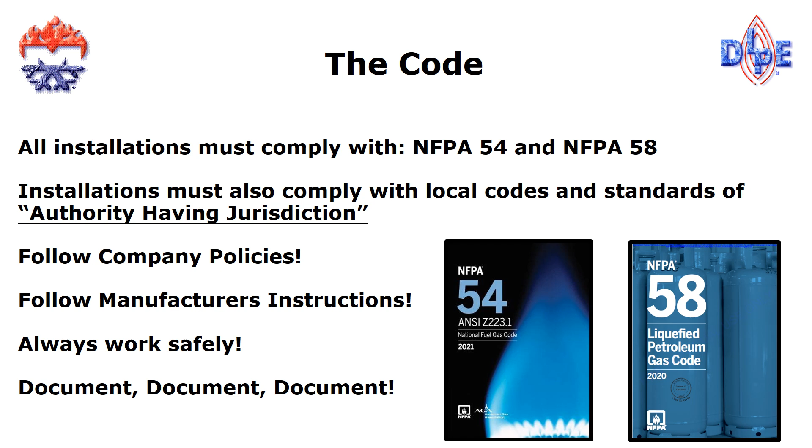A breakdown of the differences between NFPA 54 and NFPA 58: NFPA 58 covers everything from the container all the way up to the outlet of the delivery regulator. Now that may be an integral twin stage regulator or a second stage regulator. NFPA 54 covers everything from the outlet of that very same regulator all the way inside the building.

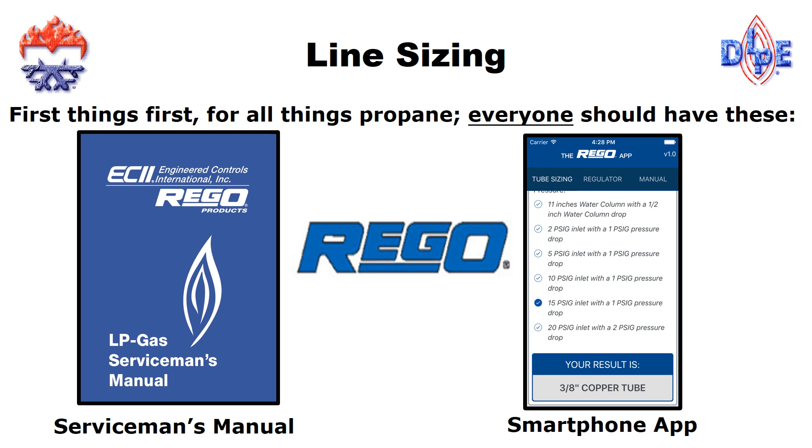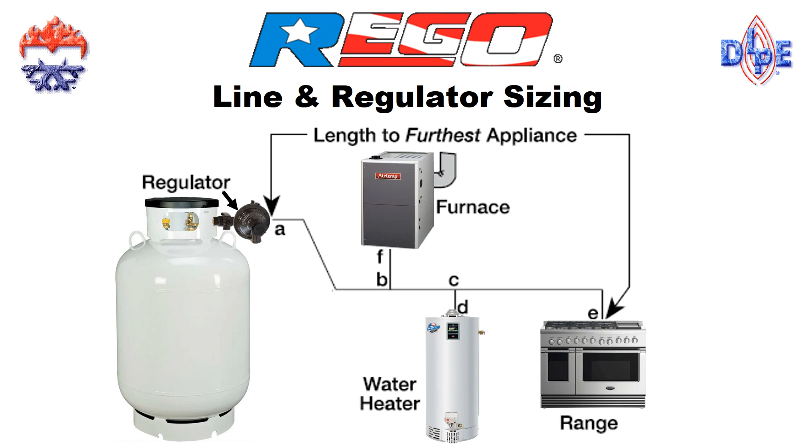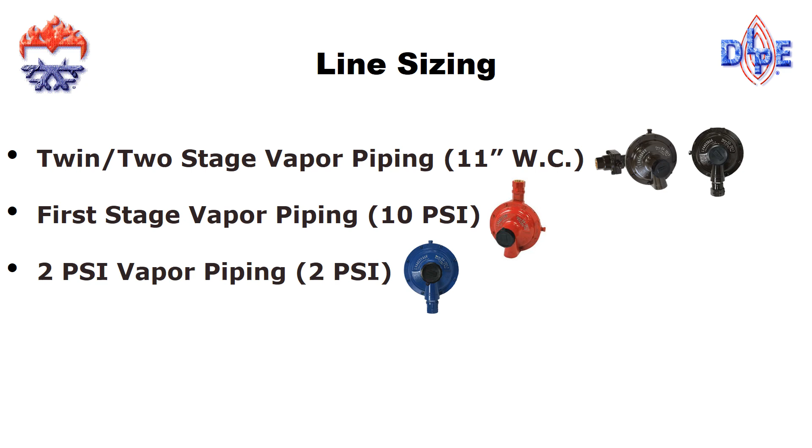Probably the most common piping installation an LP gas service technician will do is low pressure 11-inch water column piping systems. Today we will be discussing and sizing some low pressure installations as well as some other things. Part of the conversation today will be twin or two-stage vapor piping, first stage vapor piping, 2 psi vapor piping. We're going to discuss a little bit about liquid piping and also some generator piping tips.

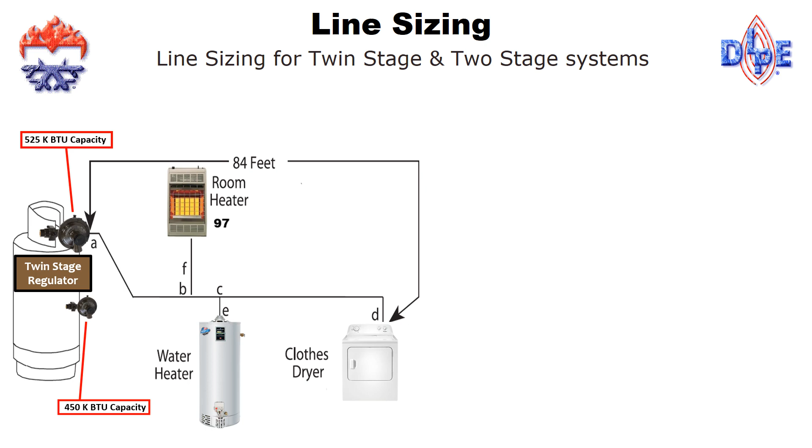Low pressure piping applications can be viewed as either twin stage installations or two-stage installations. A typical twin stage installation generally occurs when the container is closer to the building, whereas a two-stage system, oftentimes the container is set out away from the building, allowing the use of high pressure from the container up to the building, where the second stage regulator will drop it down or reduce it to operating pressure, 11 inches water column. You'll note in this slide that a twin stage regulator is the same color as a second stage regulator. That's because REGO identifies these regulators by the outlet pressure they're set to. So a brown regulator indicates that this regulator is set for 11 inches water column.

Additionally, when sizing a regulator for either a twin stage or a two-stage installation, always compare the BTU capacities of the compact and the standard size. If the BTU load of the job is close to the capacity of the given regulator or the smaller regulator, always move up to the next size.

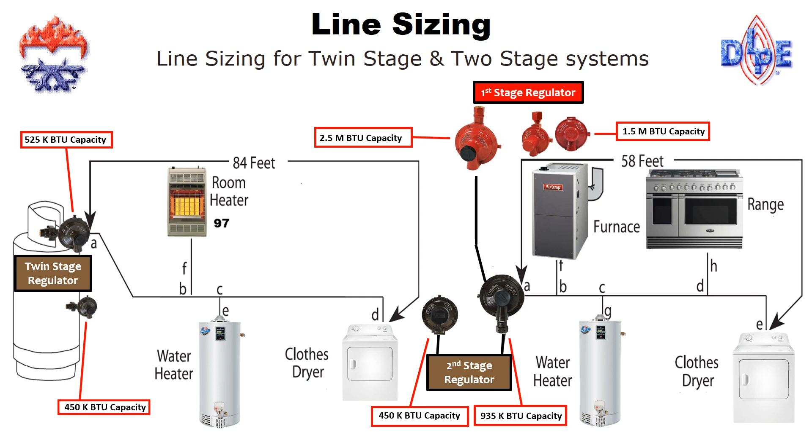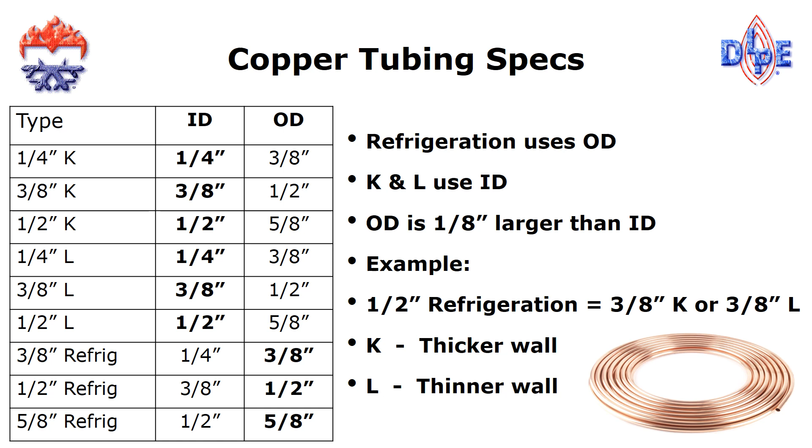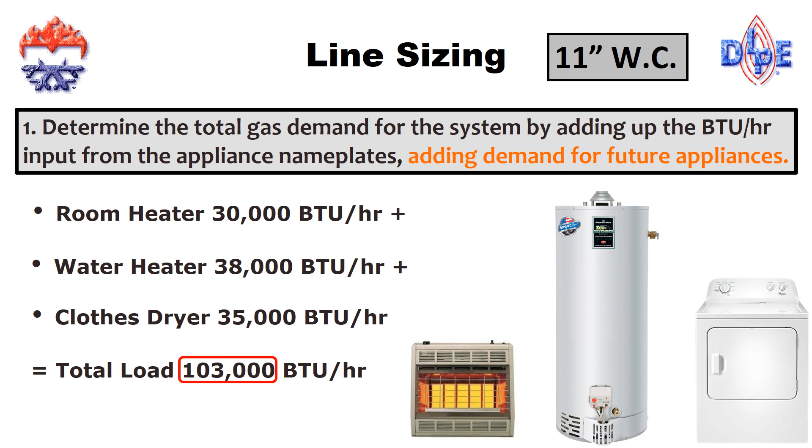Start out today by sizing a very simple low pressure piping system for a residential application. The very first thing we do whenever we're sizing a propane piping system is to add the total number of appliances that this system will be required to supply. In this case, we have a 30,000 BTU room heater, a 38,000 BTU water heater, a 35,000 BTU clothes dryer. All three appliances have a total of 103,000 BTUs. Remember, propane appliances operate at a low pressure of 11 inches water column. Now is also the best time to ask the property owner if they're going to be adding additional appliances. Provisions should be made now if appliances will be added in the future. Oversizing the line to account for the additional appliances will save time in the long run.

The next step to size a second stage or twin stage vapor piping system is to take a measurement from the outlet of the delivery regulator to the inlet of the appliance that's farthest away. In this case, it's the outlet of the twin stage regulator to the inlet of a clothes dryer. That's the only measurement you need when sizing a piping system.

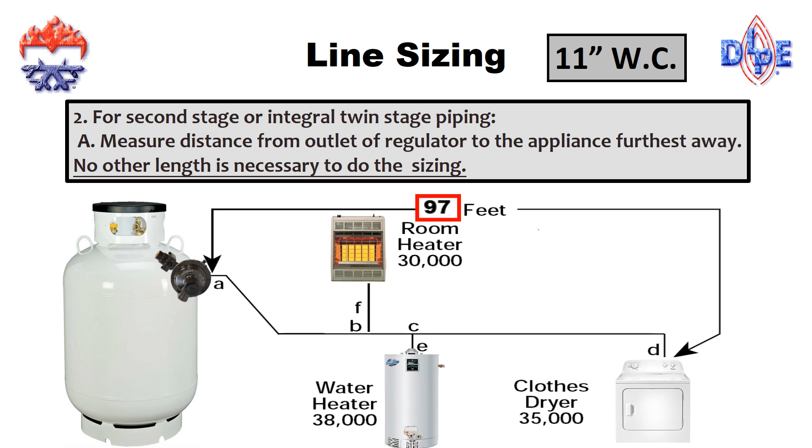The next step would be to make a simple sketch or a map of the piping installation.

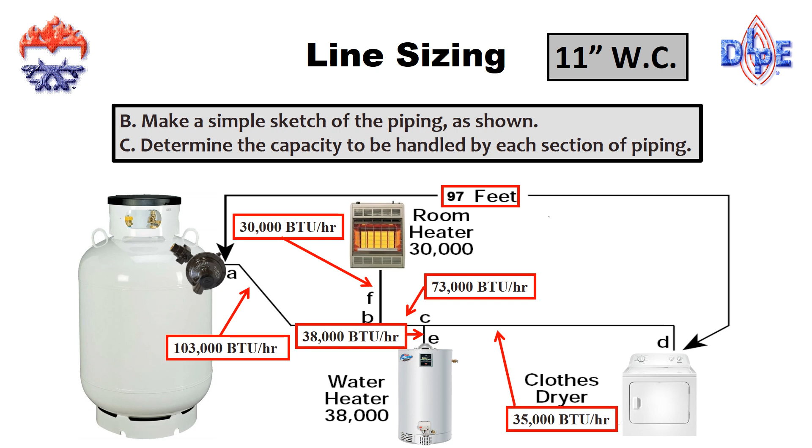The next step is to determine which table in the L545 we're going to use, and also which column we're going to use with regard to the length of piping. Remember, we're sizing a low pressure 11-inch water column piping system.

Also remember that when we took that measurement between the outlet of the delivery regulator and the inlet to the appliance furthest away, it was 97 feet. Well, if you look at the columns on table 3, you'll notice that there is no 97-foot column. So what we choose in this case is the 100-foot column. You always want to use the column longer, or the number higher than the actual measurement. You never want to go down, you always want to go up.

This 100-foot column on table 3 will be used for every piping measurement that we make. In other words, the main trunk line from the regulator to the first tee, from the tee to the space heater, from the tee to the water heater, and also from the length of piping to the dryer. So regardless of how long these actual runs are, the 100-foot column will always be used in this particular application.

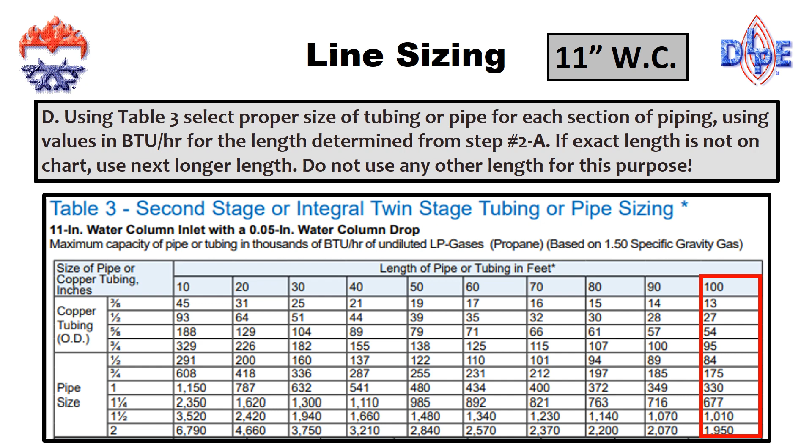The first section of piping we're going to size is what I call the trunk line, the section of piping between the regulator and the first tee in the system. This section of piping is going to be required to handle the entire BTU load at any given time, so it has to be sized, in this case, for 103,000 BTUs.

Remember, using the 100-foot column, we're going to size this piping. We know we need at least 103,000 BTUs. So if we go down that 100-foot column, we finally see a number that's over 103,000. It happens to be 3/4 inch black iron pipe. So we're going to choose 3/4 inch black iron pipe for this application, this main trunk line, which will give us 175,000 BTUs at 11 inches water column.

The next section of piping in this installation is the section or segment of piping between B and F, or the first T in the system, to the inlet of the 30,000 BTU space heater. Again, using that 100-foot column, we go down and look for the BTU value, or the number higher than 30, or higher than 30,000. In this case, we're finding...

54,000 for 5/8 copper tubing, or 84,000 for half-inch black iron pipe, depending on what material you will be using. So again, in this case, we're going to be using either 5/8 copper or half-inch black iron, because the numbers represented in the 100-foot column are higher than the BTU value that is required for that heater.

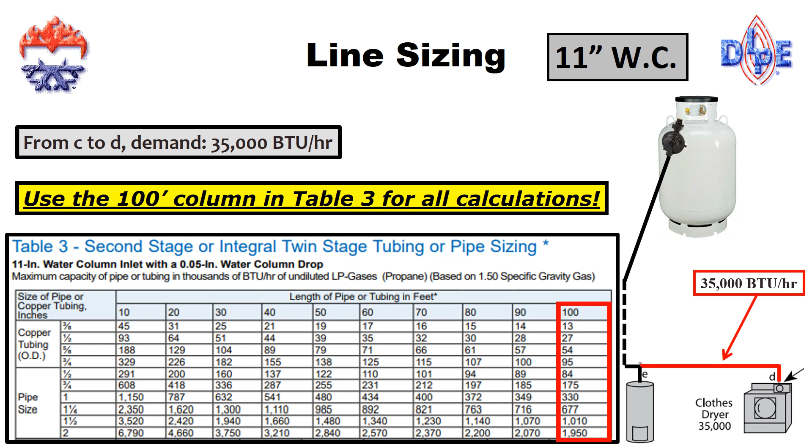And the last section of piping, between the second T and the inlet to the clothes dryer furthest away, again using the 100-foot column, we're looking for numbers over 35,000 BTUs. So again, in this case, we find 5/8 copper valued at 54,000, or half-inch black iron pipe valued at 84,000 BTUs. So what have we learned here?

We've learned that we're using the same column for every pipe measurement based on the longest run between the outlet of the delivery regulator and the inlet of the appliance furthest away. And we've also learned that there are different materials we can use to accomplish the same thing.

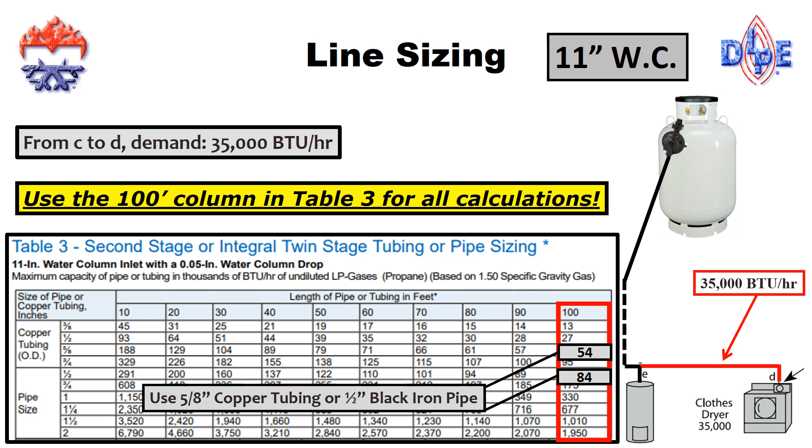My guess is in this particular installation, the installer would run a 3/4 inch trunk line based on our calculations, and then either continue for the entire installation with 3/4 inch black iron, or branch down to half-inch black iron to complete the installation. Either one would work, provided no appliances will be added in the future.

What's often overlooked when sizing a piping installation is accounting for the fittings. On page 48 of the REGO L545, you'll see the representative equivalent lengths of pipe for various valves and fittings. For example, a 3/4 inch Schedule 40 90-degree elbow equals nearly 2 feet of piping.

So for example, if the equivalent length of a 90-degree elbow, Schedule 40, 3/4 inch, is 1.8 feet, and you had, say, 10 elbows in an installation, you would have to add 18 feet onto the overall length measured from the outlet of that regulator to the inlet of the appliance that's furthest away.

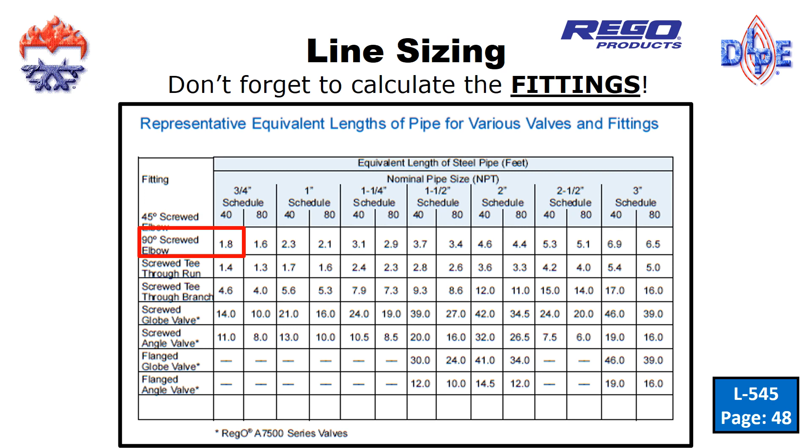We've just sized a very common 11-inch water column low pressure piping system for a typical residential application. Remember, propane appliances operate at 11 inches water column inlet pressure.

Now we're going to size the first stage side, or the high pressure side, of a two-stage installation. This could be either a conventional two-stage installation or a two-stage 2 psi installation. The first stage side of either one of those installations is sized exactly the same.

So in this particular application, this first stage side of this installation has a 338,000 overall BTU load. We're going to be sizing our first stage side of this installation using both copper tubing and also poly pipe, in two separate charts.

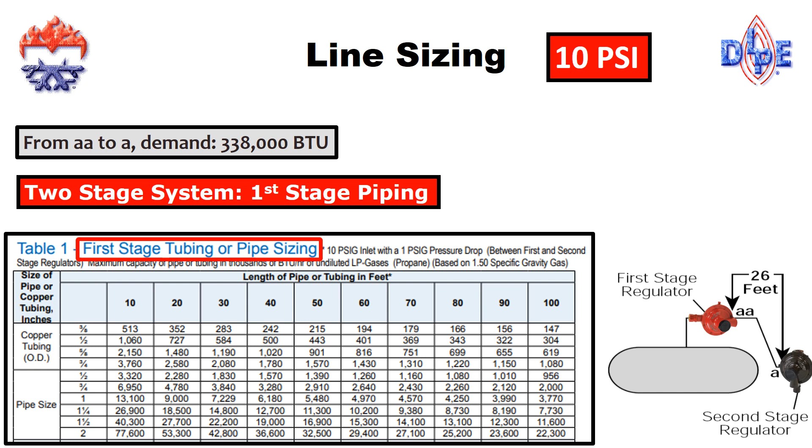So now we make sure we switch tables in the REGO L545. In this case, we're going to be using table 1. We're going to be sizing the high pressure side, or the first stage side, of this installation using copper tubing.

So in this particular case, again, we have a total BTU load of 338,000 BTUs. We have a 26-foot run from the outlet of the first stage regulator to the inlet of the second stage regulator. If you look at the chart on table 1, we're going to be using the 30-foot column in this case, because it's higher than the 26-foot length that we have in our installation.

So using the 30-foot column, and remembering that we have a 338,000 BTU total load, which size copper tubing would you use, or could be acceptable for this particular installation? By looking down, we see that half-inch copper tubing with a value of 584,000 BTUs at 10 psi and at 30 feet would work for this installation.

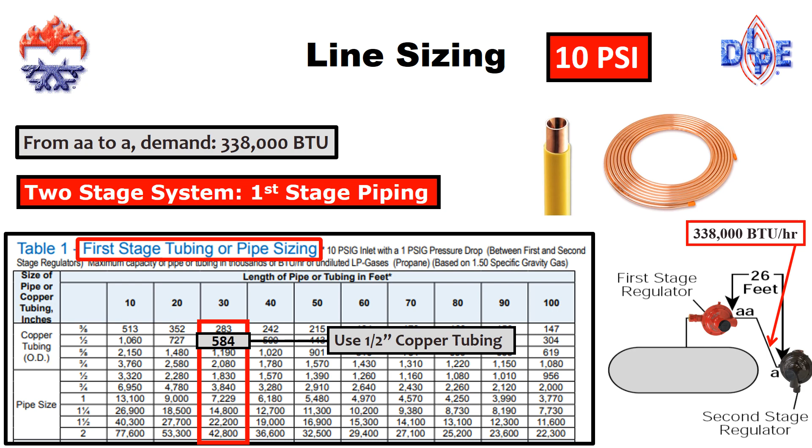If the goal is to use polyethylene pipe, we want to make sure we change tables in the book. This time we want to use table 2. We have that same installation we're sizing, so again, we have a 26-foot run from the outlet of the first stage to the inlet of the second stage.

And on table 2, we're also going to be using the 30-foot column. There is no 26-foot column. So with the understanding of a 338,000 BTU load, using the 30-foot column, we're going to be using half-inch CTS, which will get us over 700,000 BTUs.

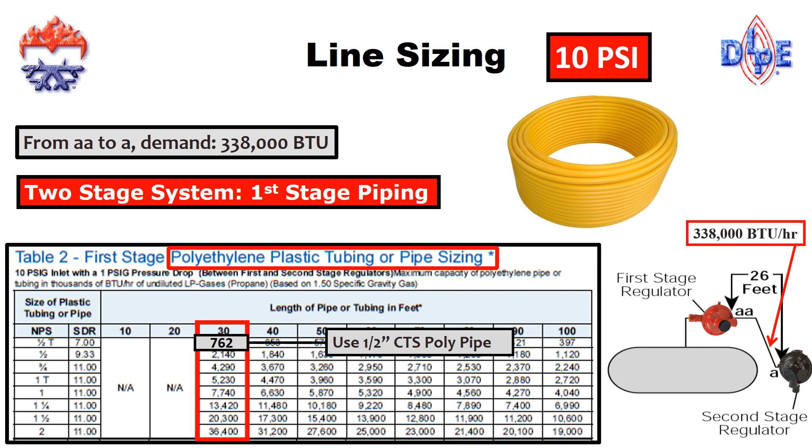On the left side of table 2, the poly pipe chart, you'll see the letters SDR, which stands for Standard Dimensional Ratio. It's the ratio of the pipe diameter relative to the wall thickness. Poly pipe with a high SDR indicates that the pipe wall is thin, compared to a pipe with a low SDR ratio, which would indicate that the pipe wall is thick.

The key here is to make sure that the fittings used with the selected poly pipe match. In other words, the sizing matches and also the SDR matches. Otherwise, you're going to have fitment issues and also the potential for a leak.

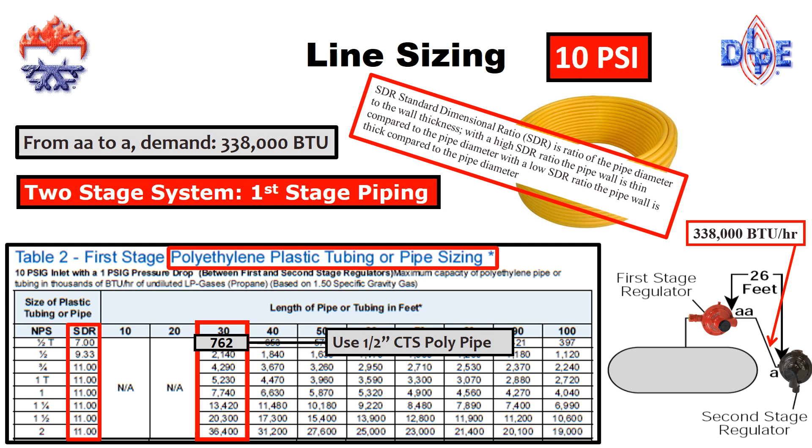A quick note about CTS, copper tube size, versus IPS, iron pipe size. Depending on what type you're using, make sure you follow the proper line on table 2. This is where the SDR notification comes in. If you're using half-inch CTS with a 7.00 SDR, make sure you're using the proper line in addition to proper fitting selection. If you're using half-inch IPS with a 9.33 SDR, make sure you're using the proper line for that material, again along with the proper fittings.

Half-inch IPS nearly triples the BTU capacity of half-inch CTS. Therefore, making sure you're using the proper line when determining the pipe sizing is critical.

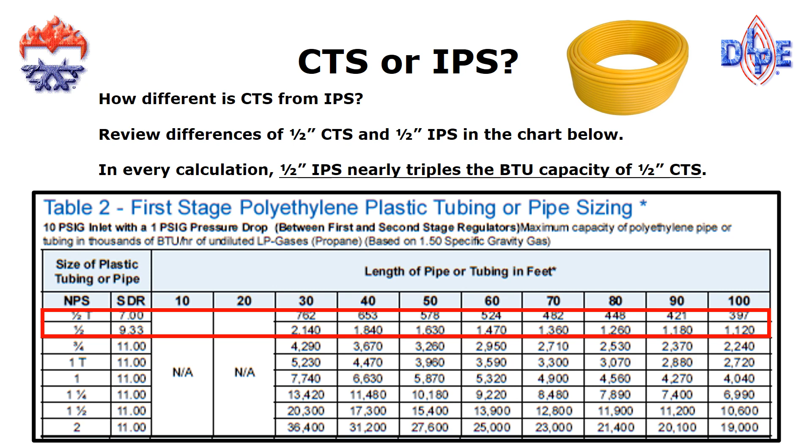We've just sized the high pressure side, or the first stage side, of a two-stage installation. Well, let's say that this two-stage installation happens to be a 2-pound system, or a two-stage 2-pound installation. There are separate charts in the L545 for reference when sizing a 2-pound system. Let's make sure we're doing it properly.

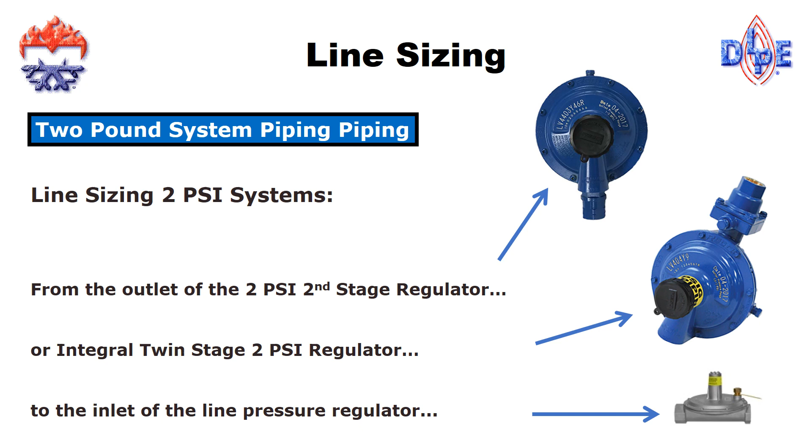The first thing is to make sure we're using the correct table. If you're going to be using CSST, for example, in this 2-pound installation, you want to make sure you're using table 4, which is the CSST 2-pound table. In this case, again, we have that same 338,000 BTU total load, but this time we're sizing it from the outlet of the 2-pound second stage regulator to the inlet of the line regulator. We have a 19-foot run, so on table 4, we're going to select the 25-foot column. We have a 338,000 BTU load, which, following the numbers down, tells us that we can use 3/8 CSST.

Please note, though, that this 3/8 CSST has to be 15 EHD, or equivalent hydraulic diameter. The letters EHD represent a measurement of the relative hydraulic efficiency between the different CSST sizes. The greater the value, or the larger the EHD number, the greater capacity the CSST has. Again, depending on what type of CSST you're using, always make sure you're using the proper line on the chart. In this case, the 3/8 CSST that we selected had a 15 EHD, meaning it would supply all of our appliances properly.

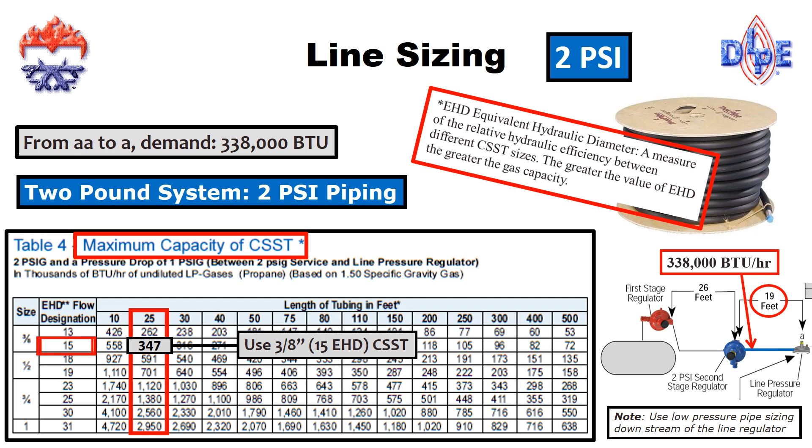If you've decided to use copper tubing for that same 2-pound installation instead of CSST, make sure you're using the proper table, table 6 in this case. Again, we have a 19-foot run, 338,000 BTUs. Following table 6, the 20-foot column, because it's just over the 19-foot length, tells us that we can use either 1/2-inch copper tubing or 1/2-inch black iron pipe. Either one of those two selections will more than handle the 338,000 BTU load for this installation.

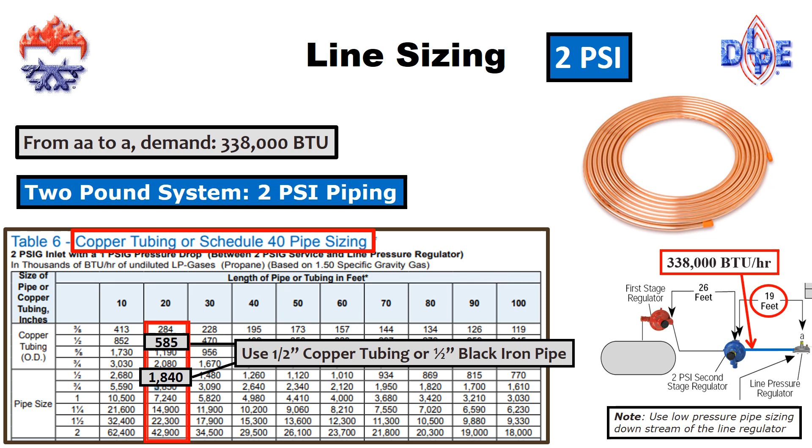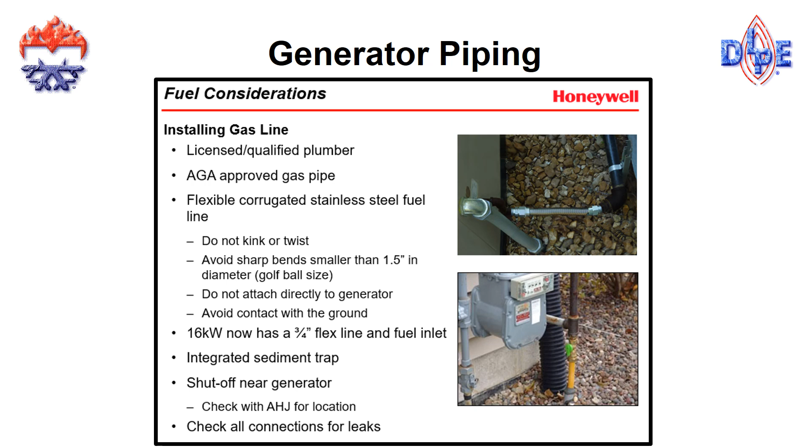It's important to make sure that we're supplying these generators with a proper amount of pressure. Generac and Honeywell require the inlet pressure to a 9 to 22 kW propane generator to be between 10 and 12 inches water column. It cannot deviate from that inlet pressure setting. Supplying a generator with 9 inches of water column or 13 inches of water column will give that generator startup issues.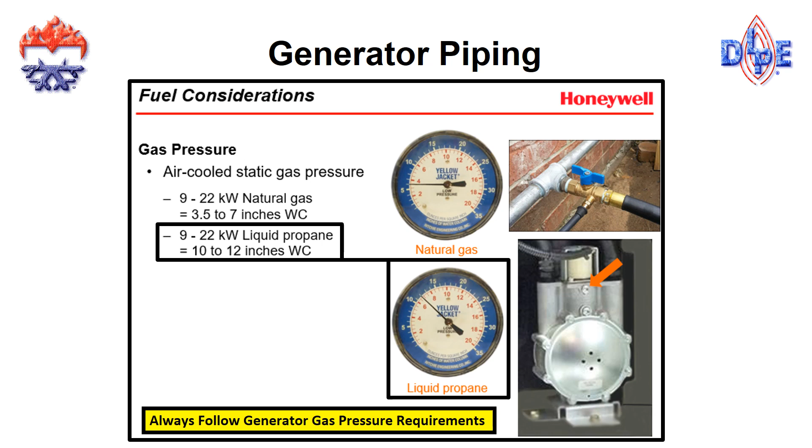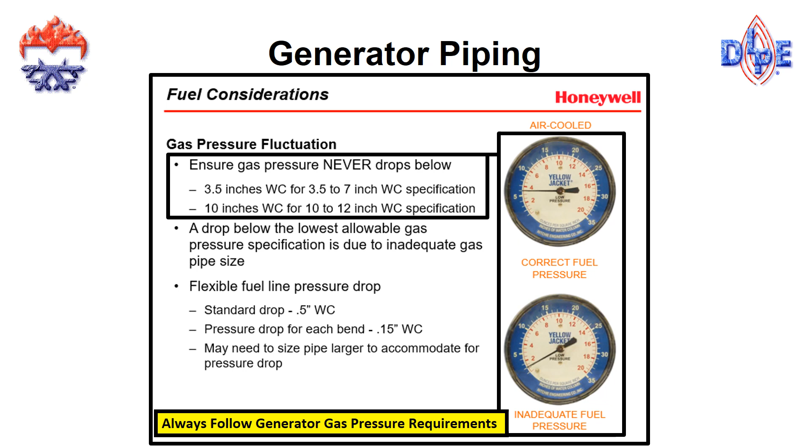Pressure that drops below the 10 to 12 inch water column spec for propane fired generators most likely indicates a pipe sizing problem. Generators do require a slightly different pipe sizing procedure. Understand that the generator inlet size does not affect the proper gas piping size. If the piping is sized at 1 inch based on the length of run and the overall load, but the generator has a 3/4 inch inlet, it will not affect the performance of the generator.

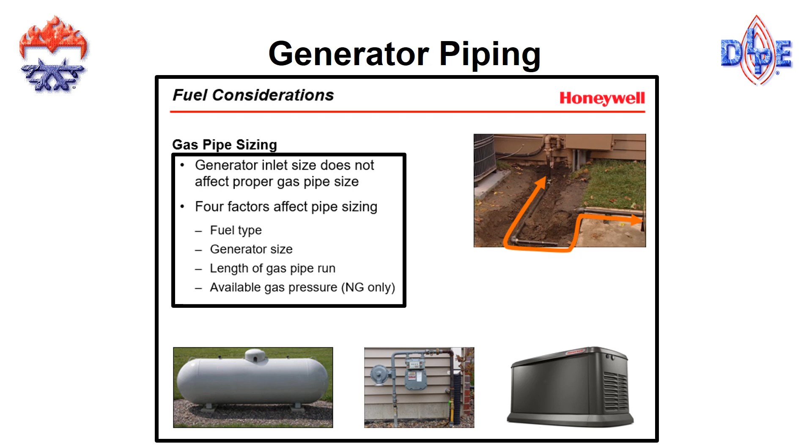When using the pipe sizing charts in the generator installation manual, it's important to note that the piping determined is based on sizing the piping at the pressure the generator operates at. For example, if it's a two-stage system, the overall length only includes the low pressure 11-inch water column side. The high pressure side is calculated in a different calculation.

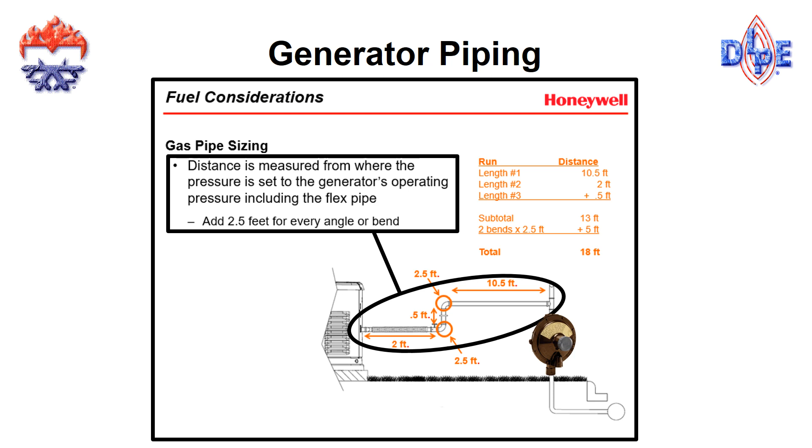Looking at this example in the Honeywell installation manual, sizing this piping at 11 inches water column, or what the inlet pressure of the generator is, we have a 22 kW generator with an inlet pressure of 11 inches water column. The length of this particular run is 18 feet. So to size this piping properly using the chart in the Honeywell installation manual, we go down the left-hand column and find the 22 kW generator, follow it over to the right and find the number that represents the next highest amount over our run.

For example, our run is 18 feet, we go over to 20, representing 20 feet, because this piping size will account for or accommodate up to a 20-foot run for a 22 kW generator. We find the 20 feet, follow it up to the very top, and it tells us that a 20-foot run of 3/4 inch pipe will account for and accommodate a 22 kW generator at 11 inches water column.

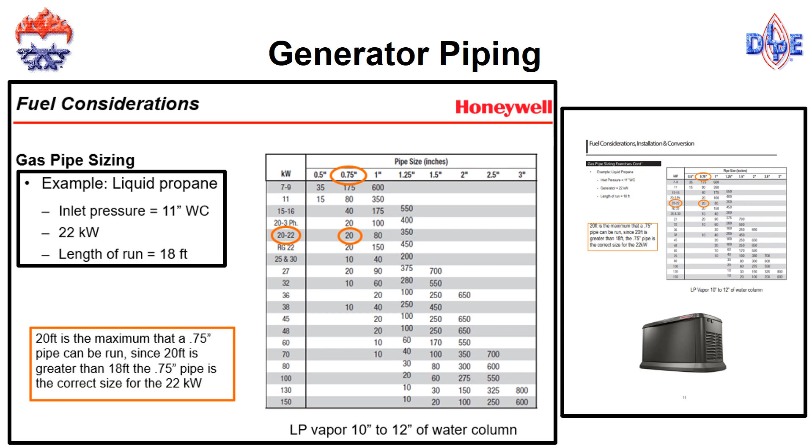What about potential generator startup issues? Some manufacturers explain and recommend installing piping one size larger than what's recommended in the owner's manual at the last 10 feet of the piping run at the generator, which may help with any startup issues. Another thing that's possible is to install a 2-inch nipple with 2-inch by 3/4 inch bell reducers at the unit as well. Sometimes this provides just enough storage capacity at the generator to help with any potential startup issues down the road.

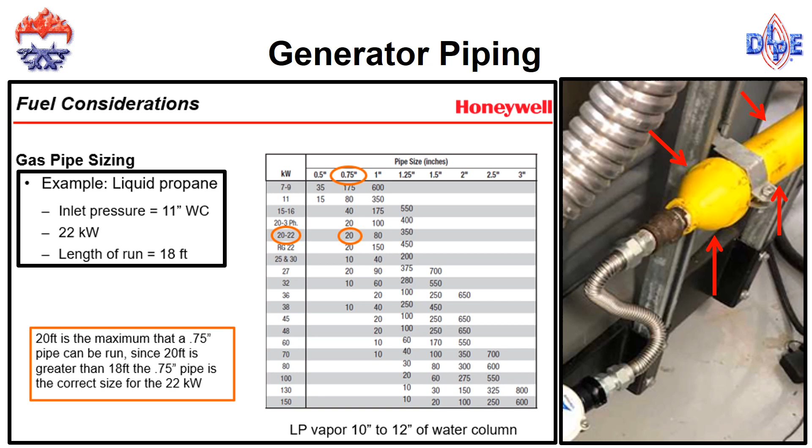One of the most important things to come away with from this seminar regarding generator piping installations and selection is to make sure the proper regulators are used. No generator installation should ever include a compact style regulator, whether it's a first stage or a second stage. Additionally, when sizing the second stage for a generator application, always make sure we size a REGO LV5503 series second stage regulator. These regulators are built with a larger diaphragm. It provides a smoother, more consistent pressure delivery, in particular to these high demand generators, and it will assure a smoother startup, especially with any installations that have had startup issues in the past.

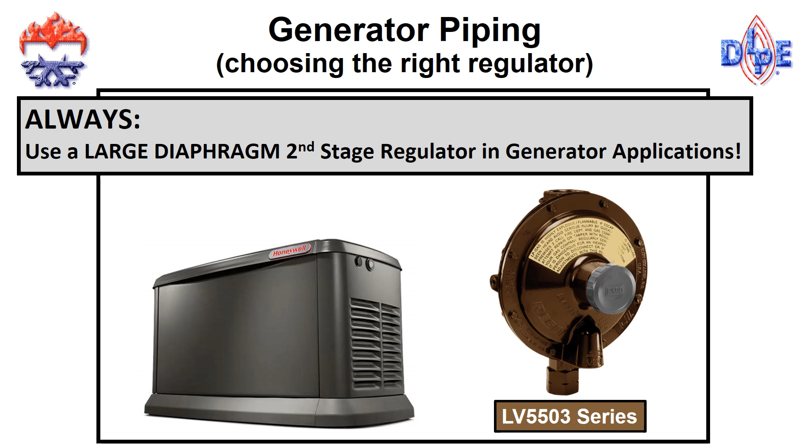Sometimes it's not possible to properly install a second stage regulator at a generator. We've worked closely with REGO and we've come up with a solution to some of those instances.

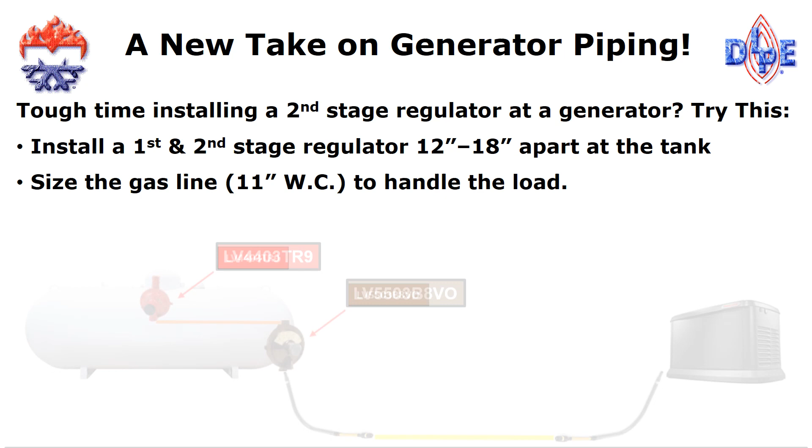Sometimes simply installing an LV4403 TR9 along with an LV5503 B8VO with a vent over outlet at the container, and running piping from the outlet of the regulator to the inlet of the generator, will supply enough pressure and enough BTUs to allow for smooth generator operation. Of course, the piping has to be sized properly, the regulators have to be installed properly, and in particular that 5503 series second stage is required to have a vent over outlet so it can be properly installed per NFPA 58 specs.

What about sizing liquid propane piping? On page 47 of the REGO L545, there's a chart to do just that. You must determine what the total gallons per hour usage is at the point of use. You'll also have to determine the distance between the container supplying the liquid and the inlet to that piece of equipment. Once you've determined the gallons per hour consumption and the distance from the container to the equipment, the chart makes sizing that liquid piping very simple.

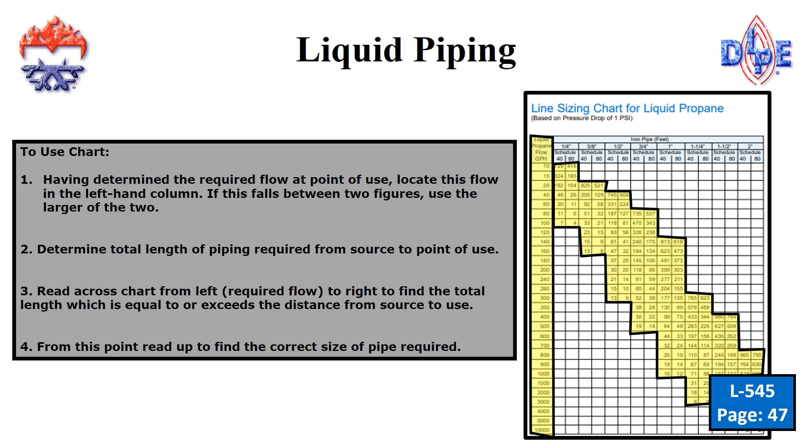Here's a comparison between K-copper and Schedule 80 steel pipe when you're determining what pipe sizing to use for that liquid burning appliance that you're connecting to.

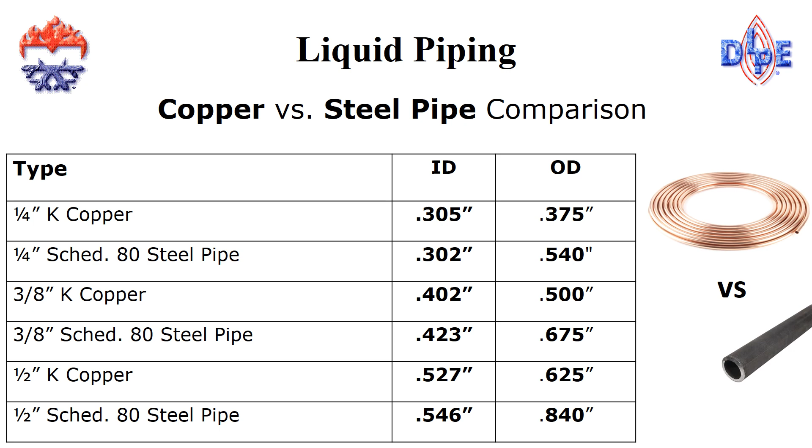I'd like to take a minute and discuss the differences between pressure testing and leak checking. Many times these are confused in our industry. The difference is pretty straightforward. Section 8.1 of NFPA 54 indicates that pressure testing is only done on new installations or when an existing installation is modified or added to. It's done at 1.5 times the proposed maximum working pressure of that system, at not less than 3 psi for a minimum of 10 minutes in a single family dwelling. Air, nitrogen, carbon dioxide, or an inert gas can be used for this test.

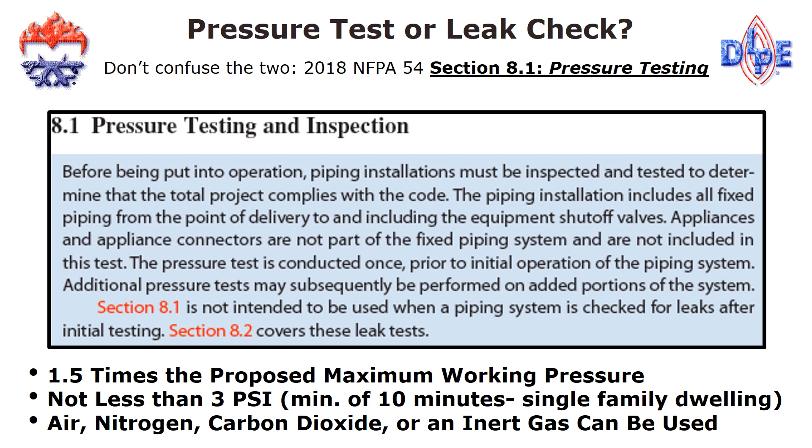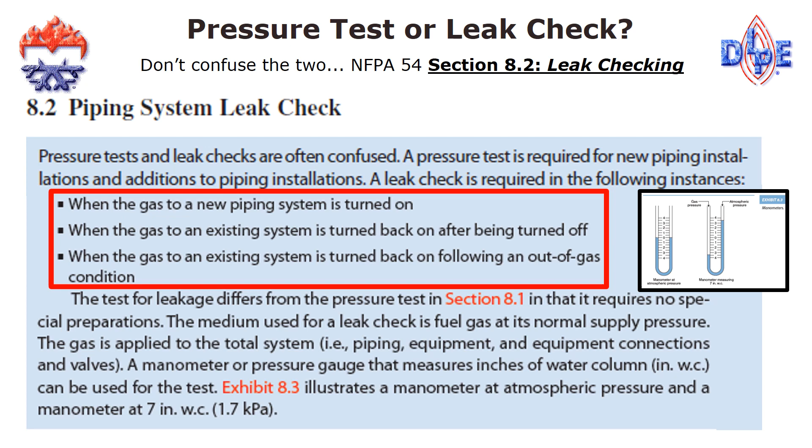By comparison, NFPA 54 determines that a leak check is required when the gas to a new piping system is turned on, when the gas to an existing system is turned back on after being turned off, or when the gas to an existing system is turned back on following an out of gas situation. Basically, this follows any interruption of service—that would determine that a leak check is required.

Leak checking should be done when a system of new or modified gas piping is placed into service for the first time, assuming it's already been pressure tested; when a gas leak is suspected; when a gas meter is replaced; when an appliance or appliance connector is replaced; or when an out of gas condition or interruption of service occurs. Those are all key indicators for the requirement of a leak check.

Leak checks can be done using tank pressure, high pressure, or inches of water column. A leak check must hold pressure for a minimum of 3 minutes. If tank pressure is used, before the check begins you must drop that pressure 10 psi. If high pressure is used, you must drop that pressure a minimum of 2 psi. If water column is used, you must drop that pressure to 9 inches water column. This will unlock the regulator and allow the leak test to be done properly. If you review Annex C of NFPA 54, there are many more details and much more information on conducting a proper leak check.

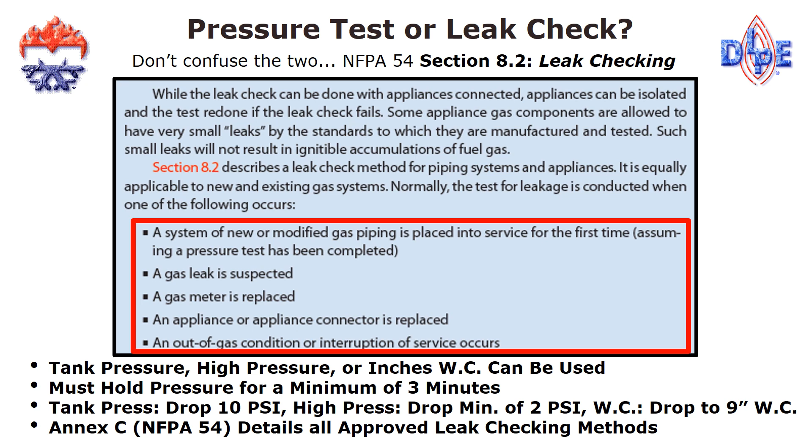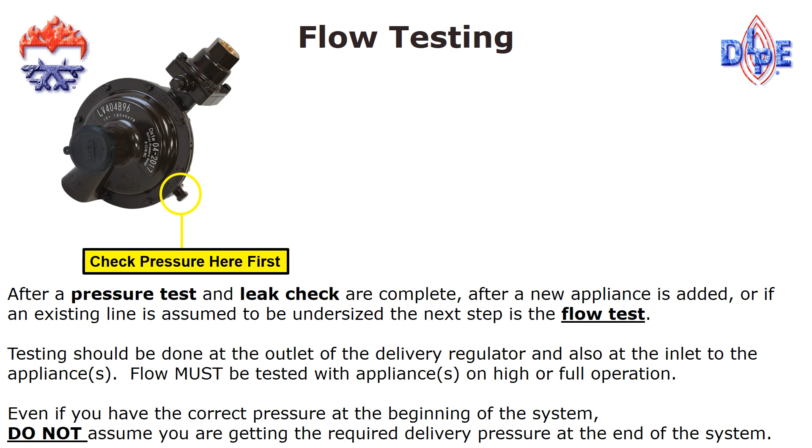Once we have the pressure testing and the leak checking done, the next step is flow testing. Flow testing ensures that the lines are sized correctly. In flow testing, all of the appliances are turned on in the building. The pressure is checked at the outlet of the delivery regulator to make sure it's within specs. Once it's determined that the regulator pressure is set properly without needing any fine tuning, the pressure is then checked at the appliances, again under load when the pressure check occurs. The data plate on the appliances will indicate not only the required inlet pressure but also the manifold pressure.

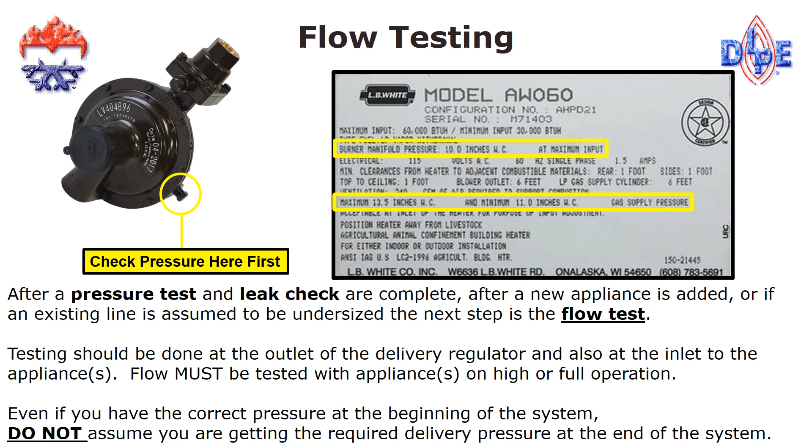A flow test will verify that the piping is sized accurately. It does this when you test the pressure at the appliance. If the appliance inlet pressure is within the manufacturer's specifications when the appliance is operating under full load, then the piping is properly sized. If the piping is not properly sized, the inlet pressure at the appliance will be low.

If an adjustment is needed to the regulator, it's important to know that only fine-tuning the regulator outlet pressure is allowed. Never adjust a regulator higher to make up for an undersized gas piping system. This is an example of what you would see at the outlet of a delivery regulator with the appliance at full load.

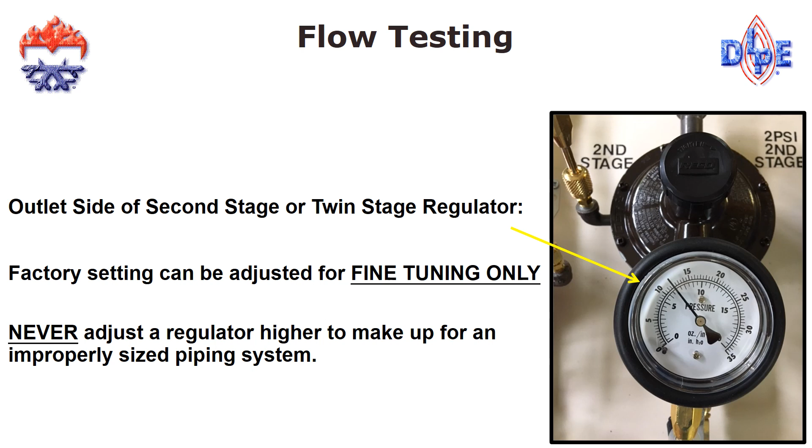In this case, we're getting 12 inches water column out of this REGO second stage regulator. Visually inspecting the flame characteristics on a propane gas appliance will not determine if the propane gas line has been sized properly. The only way to identify if the appliance is getting the proper amount of gas pressure is to put a manometer on the appliance. By looking at these two images, can you see a difference between these two burners with your naked eye?

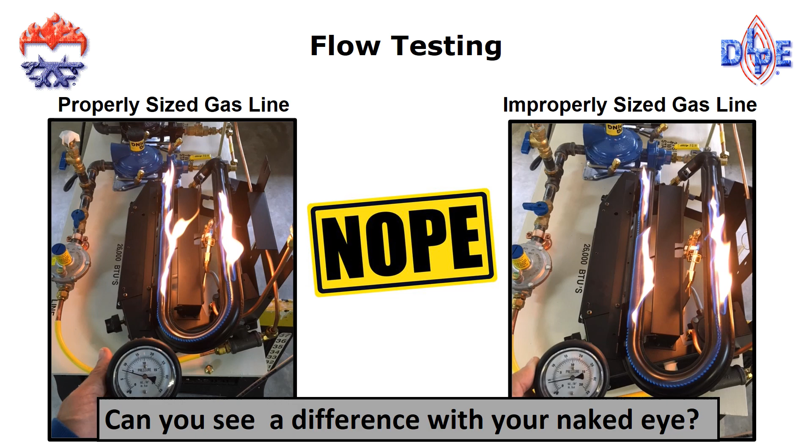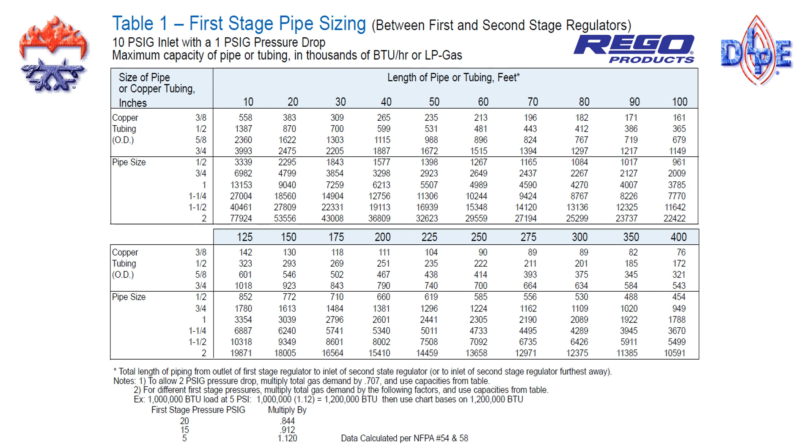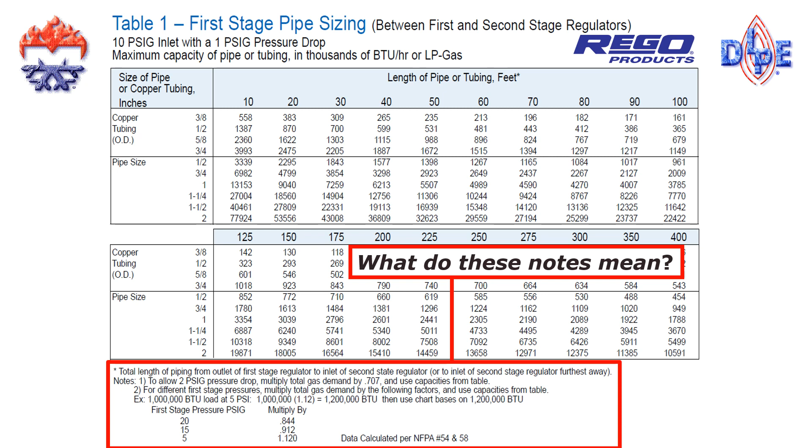We're nearing the end of this presentation, but there are a few things that I think are important to point out with regard to using the tables in the REGO L545. You'll notice at the bottom of each table, you will see notes. What do these notes mean? There are different multipliers we can use if a different first stage pressure is needed.

Table 1 is the first stage pipe sizing chart that we used earlier in the presentation. This table is based at an inlet pressure of 10 psi. But what if we want to run 5 psi in that same line as opposed to 10 psi? What do we need to do to calculate that that line is sized properly?

In order to see if the line is sized properly for 5 psi instead of 10 psi, we basically need to fake out the chart. We need to take that overall BTU load, or that demand of 338,000, and multiply it by 1.12. What that does is it inflates the BTU demand that you compare to the chart. So for example, once that multiplication is done, you come up with a value of 378,560 BTUs. That is still greater than what the actual demand is, so therefore the line size would not have to be changed. It could remain half-inch copper tubing.

We would use a similar exercise if we wanted to increase the first stage pressure. For example, if we wanted to go to 15 psi instead of 10 psi. In this case, we have that same 338,000 BTUs, but if we want to see what the capacity of that line would be at 15 psi, we're going to multiply the total BTU load by 0.912. We're actually, again, faking out that calculation and reducing what the overall load would be, even though we're technically not removing appliances or reducing the load. We're faking out the chart.

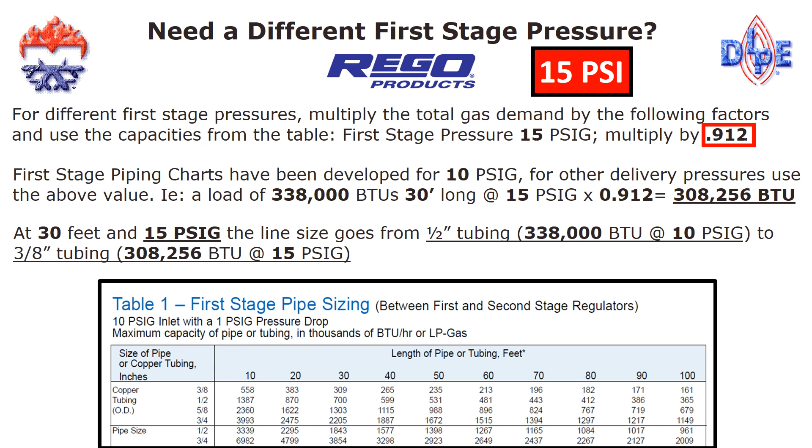So if we use our 15 psi multiplier of 0.912 against our original BTU demand of 338,000, it gives us a value of 308,256 BTUs. That number is what is used to reference the chart to determine what size piping would be adequate for 15 psi delivery service. In this case, if we use the 30-foot column, it tells us that 3/8 copper tubing would get us 309,000 BTUs. That is just over what our number is once we've used the multiplier at the 15 psi. So in other words, even though we needed 1/2-inch copper tubing for 10 psi, if we increase that first stage pressure to 15 psi, it now falls below the threshold of what the 3/8 copper tubing would handle. So therefore, with 15 psi, we can now reduce that piping size to 3/8.

And of course, the same exercise would take place if we want to increase the first stage pressure to 20 psi. The only difference is that you would use a different multiplier, of course, and that multiplier would be 0.844. Essentially it says that we would go from, again, 1/2-inch tubing at 10 psi to 3/8 tubing at 20 psi, because our new BTU demand, the new BTU value based on 20 psi and its multiplier, would be 285,272 BTUs. So therefore, again, you would go from 1/2-inch to 3/8 copper tubing.